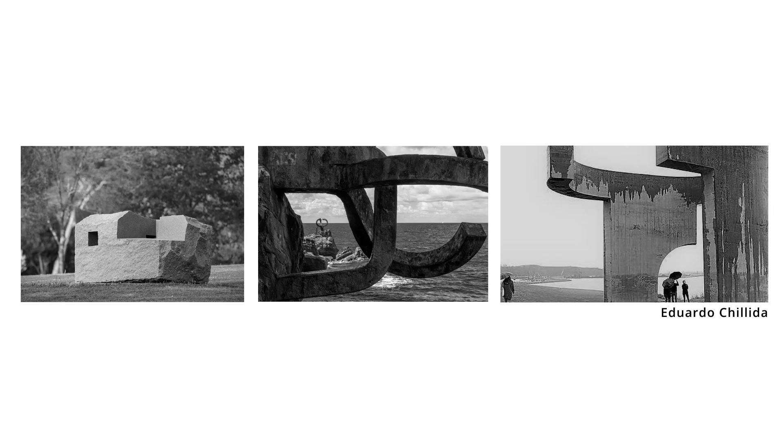Well, it's never easy to explain how a project starts. It usually starts with a commission, but at a certain moment, we as architects have to make a decision about which material we are going to use. And you know, looking at these sculptures, and we are not sculptors, but we deal with material. The same sculptor, Eduardo Chillida, doing a big block of stone, another with iron, and another made of concrete. So the same sculptor using different materials, understanding the potential of each material. Using concrete, he can do these kinds of cantilevers, he can decide the formwork, etc. So in architecture, I think it is important to understand the potential and the capacity of every material.

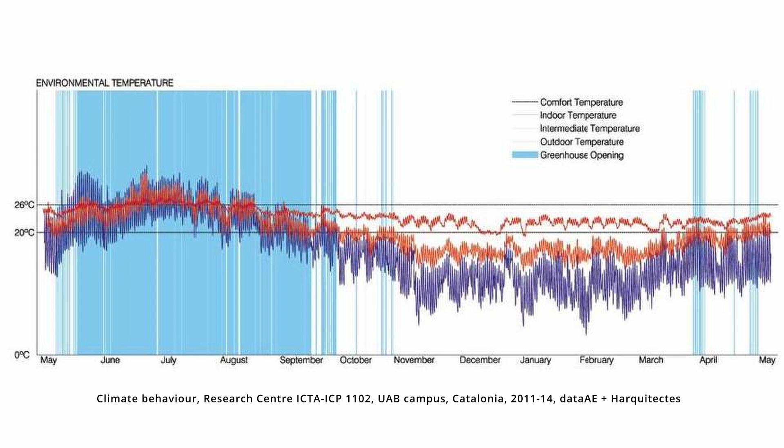Then there's the red line, always in between the black lines, describing the temperatures inside the places of the building that need to be in the mandatory range, like laboratories and some offices. The important line is this orange one, which moves following a bit the outdoor temperature. This line explains the temperature of more than half of the building without mechanical or artificial climate control, using the outdoor conditions and also the air from the more comfortable areas of the building.

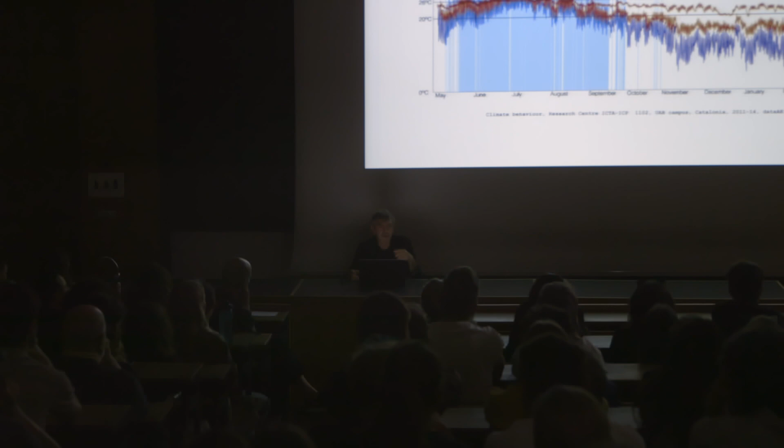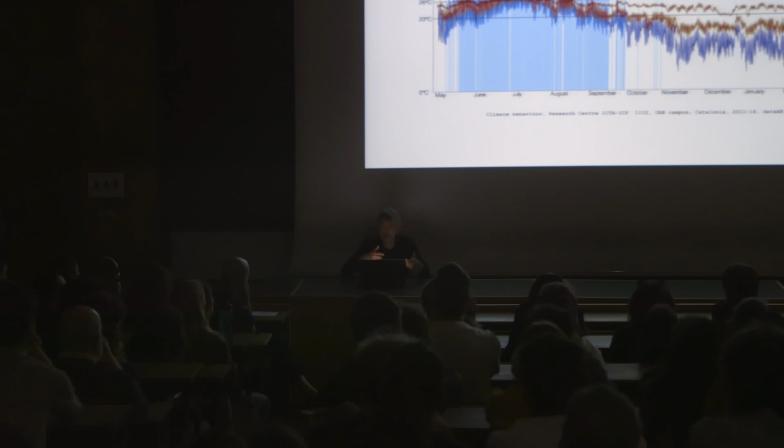These bioclimatic strategies create a temperature that's always a bit better than outside, but in summer it's a bit warm, and in winter it's a bit cold. So if you're in these in-between spaces, classrooms, halls, etc., you need to wear clothes in winter, and you need to decide if it's better to have a coffee on the ground floor in summer instead of the fourth level, which is warmer in winter. So people in this building are making decisions about where they're going to do things in these areas.

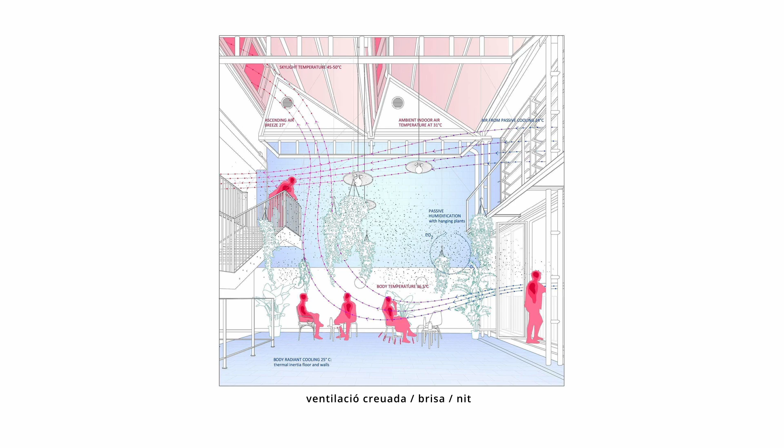I spoke a lot about thermal conditions, comfort, but we are interested in the spaces that we are creating, trying to find strategies to improve comfort. We are interested in spaces, not in the degrees of one space, and this is an important thing. We are not - and I'm sorry for the engineers - we are not engineers. We don't want to calculate, reaching the best result. We are trying to create better spaces to live.

Another condition is the extra height. You know that the basilicas are super high, so this creates a natural stratification of air, and the warm air goes up and the fresh air stays down, so it's a super nice place on summer. If you went to Barcelona, you will realize that on summer it's a good place to be. So this vertical convection is a good tool to create this ventilation during the night.

And we have a lot of sun, you know it. So how can we use the sun to improve the conditions? It's our enemy, but we can be like a judoka, and we can transform the enemy into the main element improving the comfort. And as I said before, this is what we want - to create good places to live.

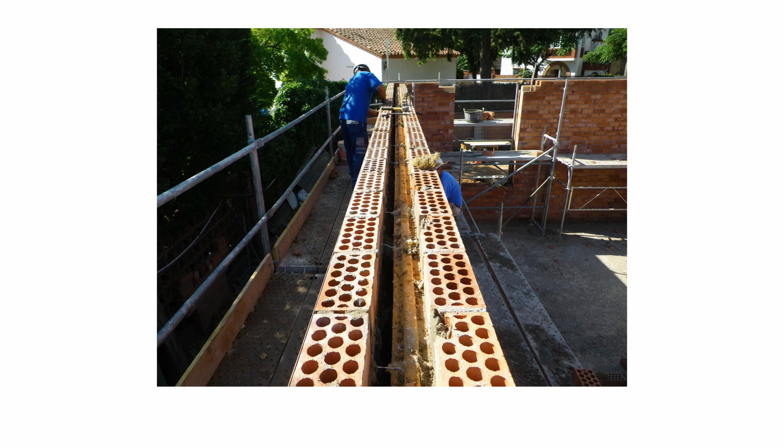And finally, the design is so basic. It's about 3 boxes made of brick, and then 2 spaces in between, like galleries, connecting the 3 boxes. We used brick in this case. Brick is a tradition, not vernacular, but the tradition of the last centuries in Catalonia, in Barcelona. We have a lot of factories doing brick, because we have good soil to do so. In this case, it was a double layer load-bearing wall.

As I said in the beginning, and it's the case of this house, we love to use structure as a way to create specific spaces. So all of our spaces are totally linked with the typology of the structure, and in this case, these load-bearing walls made of brick are creating the spaces.

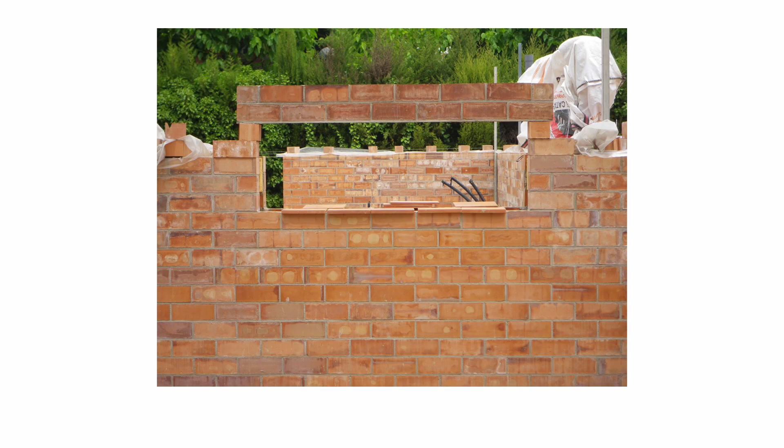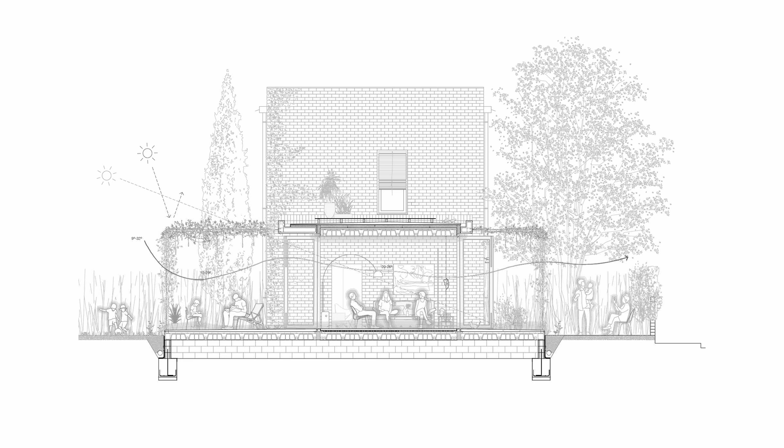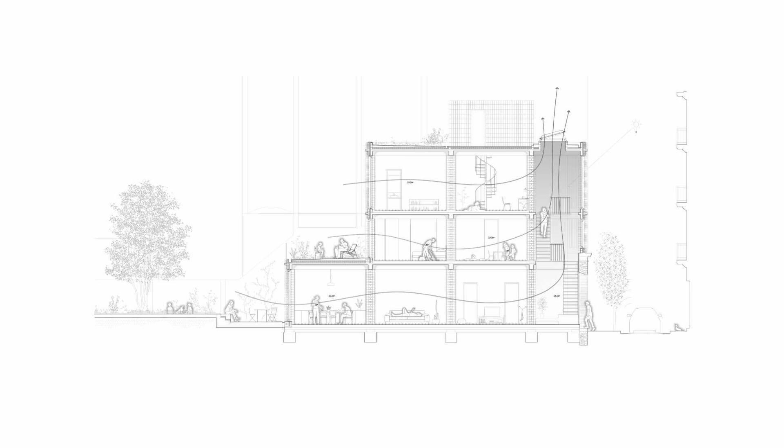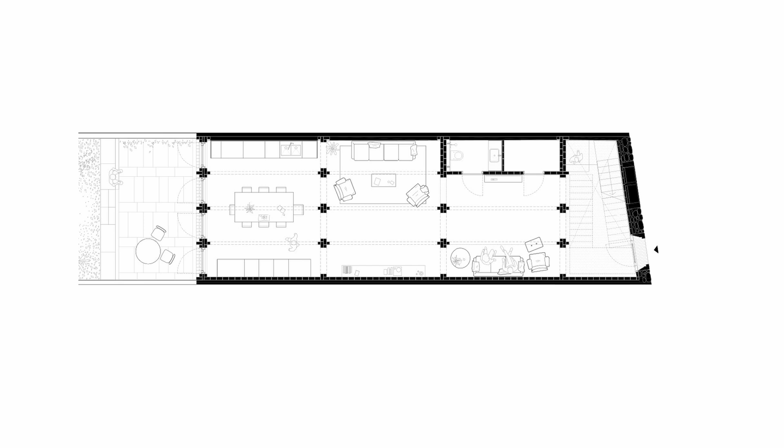But in this case, it's a more recent house in Barcelona. I share this house because it's based also on brick construction, but it's an evolution. It's not about load-bearing walls, well, a kind of load-bearing wall, but reduced to a cross column, you will see, like that. So the same brick, creating big gaps on every wall, so it's more like a column. And the space thanks to this strategy of transforming the wall into this cross column. So it's not about tradition, it's about an evolution of the more typical system.

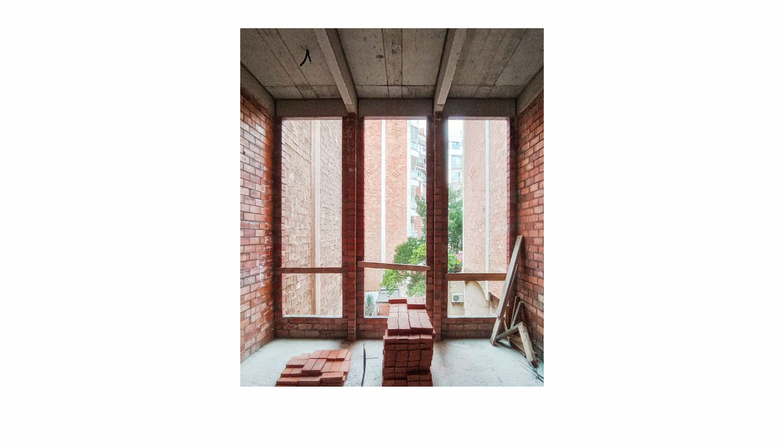And after finished, this is the space that has nothing. So it's totally different from the first house, using the same element, but working in another way.

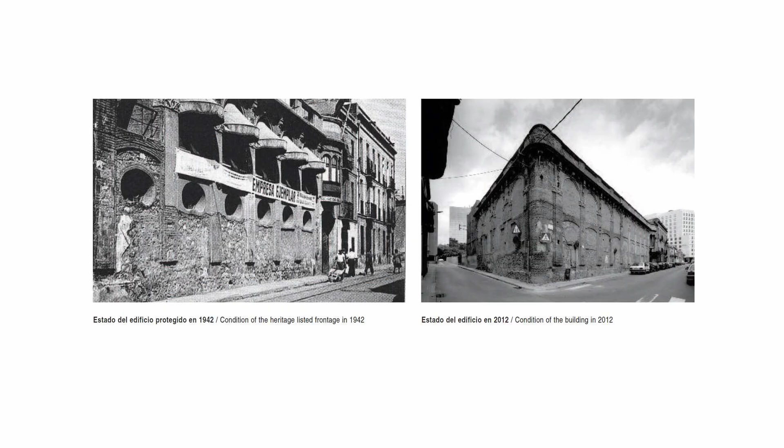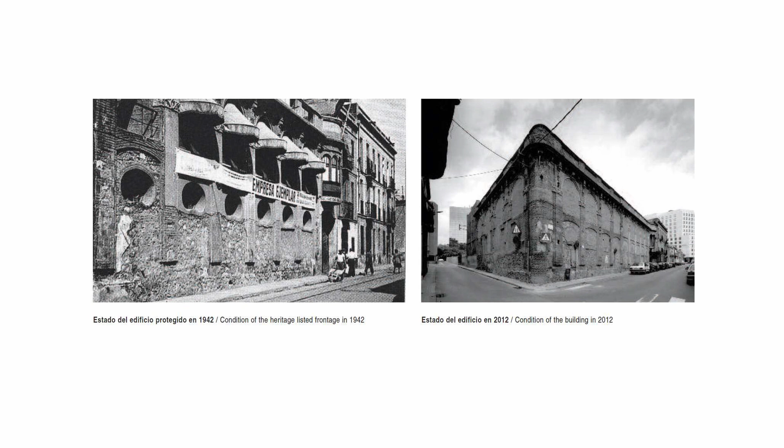And the system is very basic. In this case, we had a heritage facade, so a lot of protection for this facade of a former glass factory. Only the facade remained, the rest was demolished. And the plot was just the final piece of a super big factory located in Les Corts neighborhood, where the Barça stadium is located, so close. So it's a triangular plot, very strange, where we have a facade.

The facade is made of brick and stone, and we decided to use the facade as a structural element, and we continue with the same structural concept for the rest of the building. So we create these load-bearing walls again, and we organize the building in a very simple way.

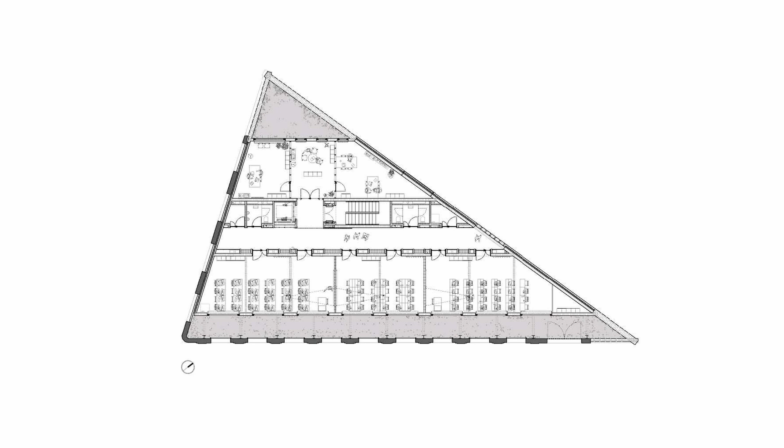On the southeast, we create a greenhouse between the old facade and the new one, just a tool to improve the conditions of the air. Then in the largest part of the triangle, we put the classrooms. There's a thick wall where the pipes connect each classroom to the chimneys, you will see later, the corridor, staircase, etc., and the smallest parts like offices in the smaller part of the triangle. Then the entrance is another greenhouse, but it's not really a tool to improve conditions, it's more a way to get inside this building.

So these two gaps, the window and the black one, are creating the cross ventilation. Coming from the basement, the underground, the air is moved to the gallery, the greenhouse, and then crosses each classroom. The air is moved for stratification, but not only for that, just for the difference of temperature. So in the chimneys, we are reaching 80, 90 degrees, so it's super high, and this difference of temperature creates the movement of the air.

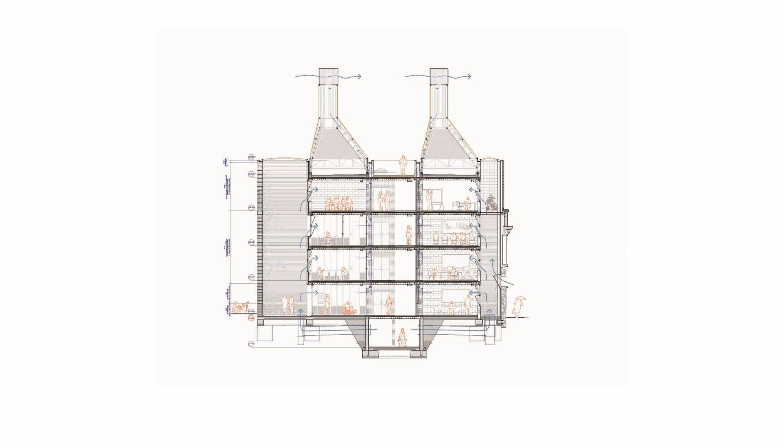You will see in the pictures a very basic chimney, an industrial chimney, to create the Venturi effect, to reinforce and increase the speed of the air, and it works so well.

On the right, in winter, everything is closed. We just open the chimneys to renovate the air when there's a lot of people for a long time in a classroom, otherwise it's always closed. And in summer it's the opposite, we always have ventilation during the day, but also during the night.

We work with engineers because we don't have the knowledge and the software to create these simulations, and we are always discussing with engineers or architects specialized in that. But all the decisions about the building are on our table.

So they create graphics, they create analysis, they create these simulations, but the shape of these chimneys is designed by us. The pyramid, this asymmetrical pyramid, different for each chimney, is based on reducing the shade that all the chimneys are creating on the others. So again, something that can be rationally explained creates an aesthetic effect, and we love that, improving the design, we are creating a language in a way.

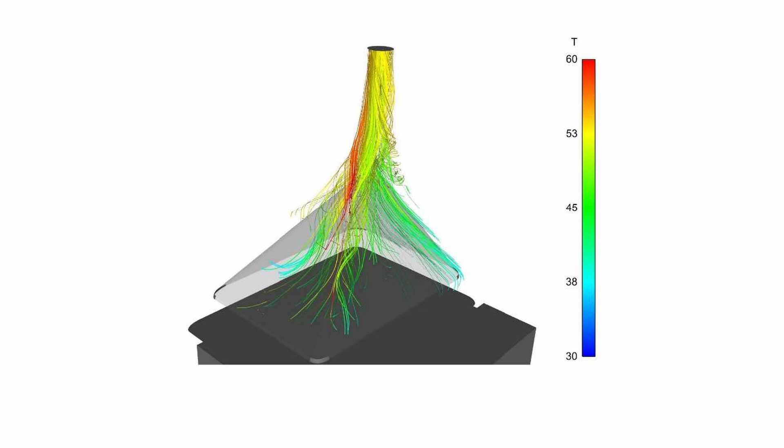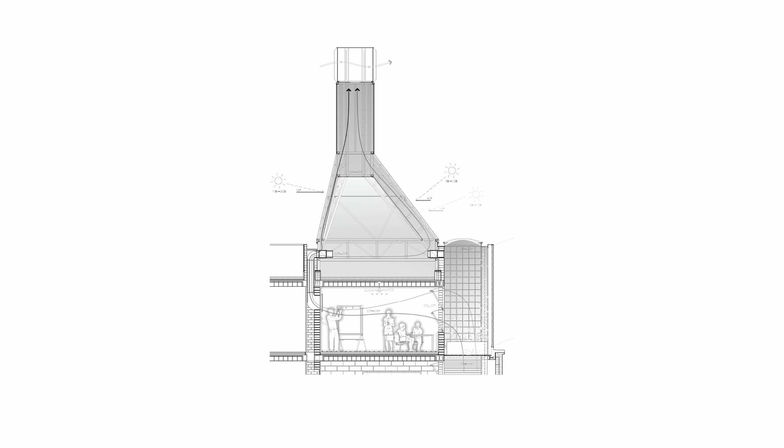I'll explain how it works. It's very simple: the air is not crossing the pyramid, it's just crossing an air chamber between the transparent one outside and a more inner one, which is a black textile membrane, to increase the temperature. So the air is coming from the classroom, crossing the pipe, arrives here, and then it moves, crossing this air chamber, and then it gets out through the chimney.

But again, of course, it's a machine and so on, but the important thing is the people, the proportions of the space, the inner facades, the relation from the inside to this greenhouse, etc.

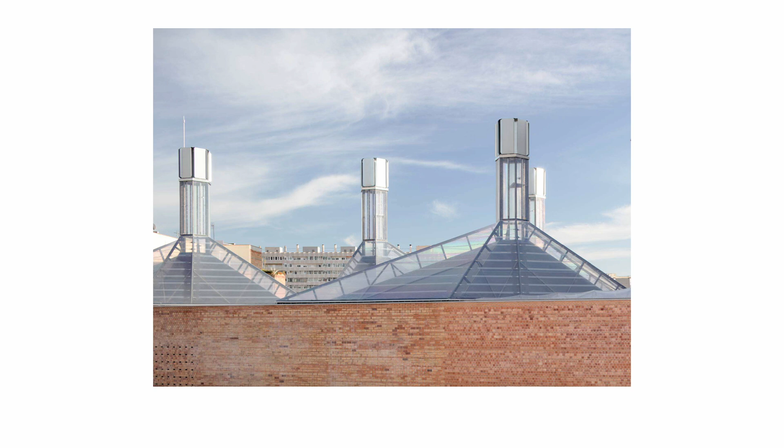And these are the 4 chimneys, a different pyramid for each chimney, the pre-existing facade and the addition that we did. We blinded some windows where we don't want windows. We respect the heritage value of this building and all the buildings that we deal with.

But it's not essential for us, so we are not always so respectful of it. For us, a pre-existing building is a tool to support, to create again a very specific language and to give a very specific character and personality to this new but old building. So we manage the heritage in that way—how can we use it, and how can we keep the spirit or personality of the pre-existing building.

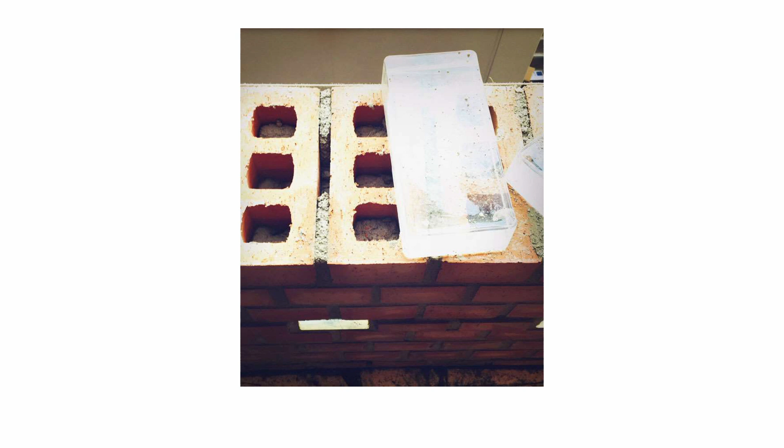This is the entrance, where everything is almost new. You can see these black dots on the facade that are lighting the inside—it's not actually a light, it's just a massive glass brick, a beautiful and very expensive one from Italy. We use it, in a way, to make a kind of homage to the past of this former glass factory.

This idea of absolute space—well, it's about monumentality, but it's about the idea of how a lot of things can come into one space.

And this is a winery in the south, a very specific area, a wine region in the south of Catalonia called Priorat. Strong wines are made there thanks to the soil. So our winery is in the middle of the city, close to the village, close to the church. The project is very simple: we put this tool to improve the conditions to create wine with these tanks. This is the main space, or almost the only space, and then there's a kind of path between the party walls, the pre-existing walls, and this perfect box to create wine.

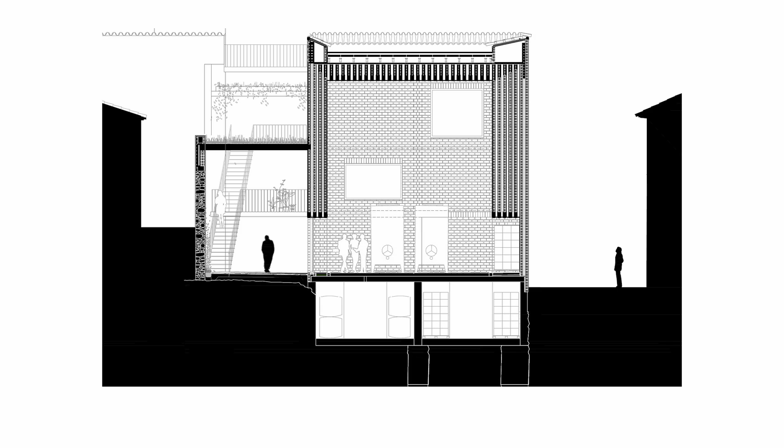As I said, we work with engineers, creating simulations to understand how this can work. The air goes up, crossing these chambers, and then at that moment—here there's a drawing of the cross ventilation for the night—but I'll explain the sophistication of the system later.

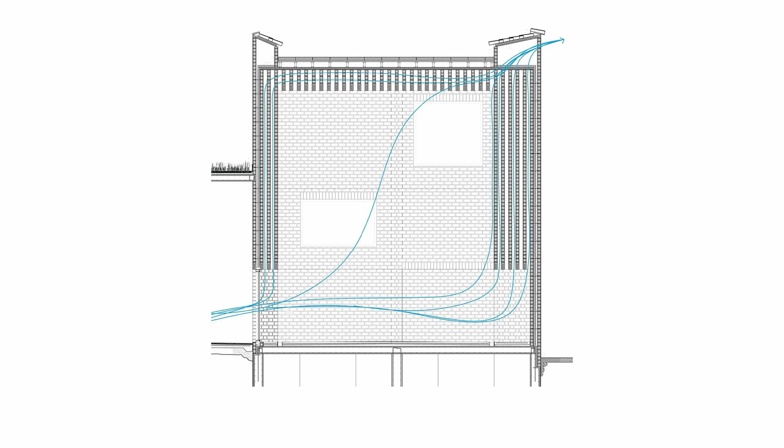This is the more conventional functionality. So we designed a tool that moves the air in a sophisticated way, but it can also work using typical cross ventilation and stratification thanks to the height, like this. This is the night-summer function, but for the air it works like that.

Inside the main hall, the air goes up as the temperature rises. It goes up, and when it touches the ceiling—the roof is made of multi-membrane layers of perforated bricks, you'll see later—the air, when it arrives on top, starts moving to both sides, left and right, and goes down, crossing the air chamber. This movement, this process, refreshes the air, and it arrives at the ground floor at a good temperature, and the cycle starts again. So this never-ending story is what's happening in this space.

Again, all these elements—the 7 layers of walls—you'll see the system on the roof, and also how it works outside the roof, which is more sophisticated. It's a tool, but it's a specific space with quality, this absolute space that I mentioned.

And here on top, there's a kind of invention, because the roof is super thin—just 2 layers of ceramic tiles. So this gap is very, very thin, and on top there's water.

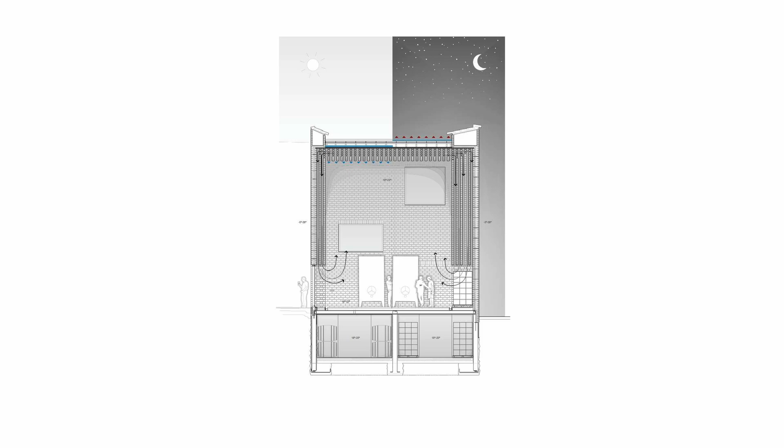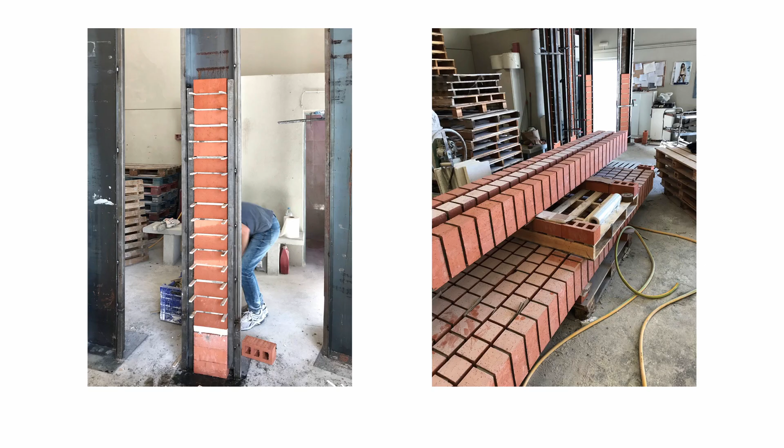And in this case, we use the brick in a very sophisticated way. So we prefabricated beams using brick to do all this ceiling, you will see later. So we put this kind of bricks with 3 gaps. It's a structural brick, it's a load-bearing brick. So we put them vertical with the steel bars inside, and we put in concrete.

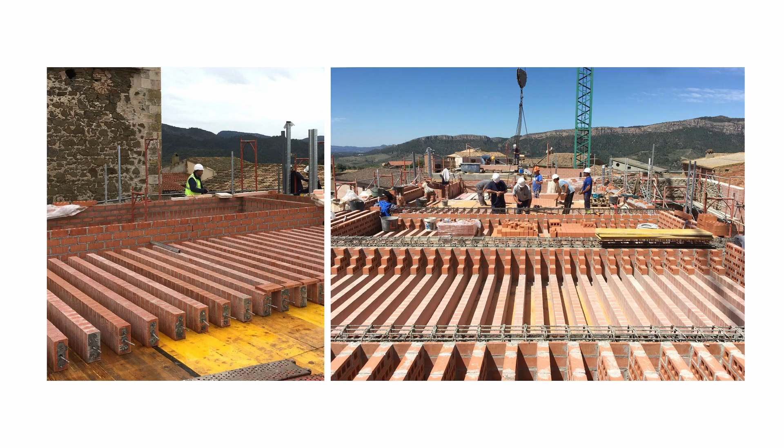This is the moment, so we fill with concrete inside the gaps, and then at a certain moment they can start working as a beam. So we did that in a factory, and then a lot of beams arrived on site, ready to start working as a beam. So you can see here the beams filled with concrete and the steel bars, and then supporting the bricks that are creating the different layers on the roof. In this case, the bricks are not horizontal, they are vertical, so the gaps are creating this ventilation effect through the gaps.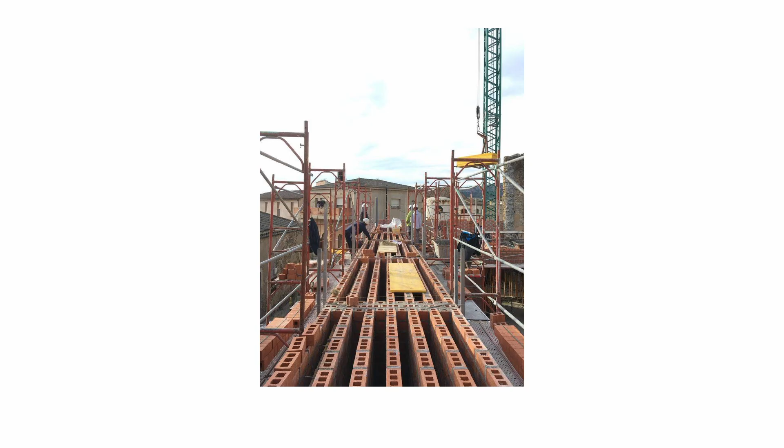These are the layers of walls that are touching the south facade. We did 80 plans like this one, describing all the bricks, the different cuts of the bricks. You can see here the white ones are the original size, the orange are a cut brick, and the yellow too. So we did this drawing for all the layers of the building, 80 times, I mean.

This is the construction. You can see the difference between north and south wall. And on top, this pool of 10 centimeters of water. Again, it's not a place to be, it's a secret, it's a hidden part, but it performs the behavior of the building. And this is the entrance to this kind of inner street. A moment where you can see the tanks where the wine is made. This is a semi-outdoor space, just roofed, but totally open. Some views to the landscape.

This is the street. Again, there are some parts that are original stone walls, but we added new layers, of course. And this is the winery itself, where the tanks are located. You know that it was not necessary. So every tank can create wine; they have a machine to regulate the temperature, so they don't need good conditions outside the tank.

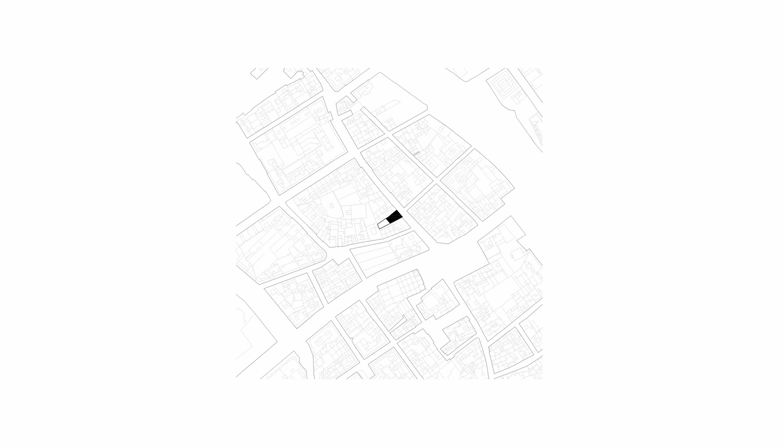And we started like that. So, okay, in this geometrically messy plot, we have an inner facade, we have a street facade, but we have a lot of depth in between. So we decided to create a big gap, a big hall, a big atrium in the middle, organizing the rest of the house. So we put this atrium inspired by the Pompeian house, you will see, and it's evident. And then we started doing a second level of rooms, which are bedrooms, kitchen, etc., connected, crossing this black element.

So we understood the house as an original concrete stone, and we started excavating in it the atrium, the rooms, etc., and also the third level of spaces, bathrooms, toilets, staircase, etc., that are painted in gray. So trying to create, depending on the rank of the space, order in this geometrically messy plot. And of course the atrium is a way to have cross ventilation for all the pieces of the house.

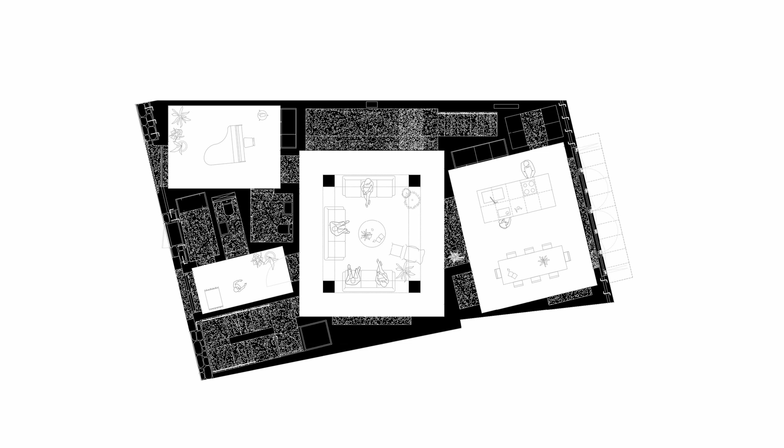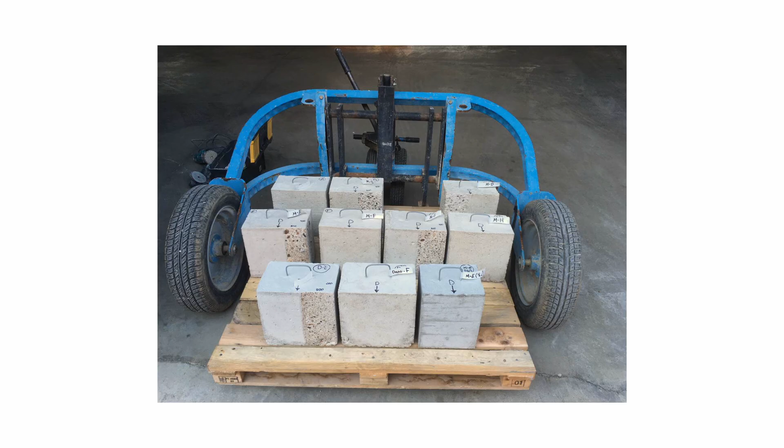And this is the plan with the garden. So it's very messy, but it has a hierarchy. For this house, the challenge was to use massive concrete, just putting steel bars in the columns, of course, but for the rest of the house, it's like a stone. And we did some tests with special concrete in different plants around Barcelona, close to the place. And on every mock-up, we tried to polish the concrete, because all the excavated spaces, toilets and bathrooms, are polished, you will see.

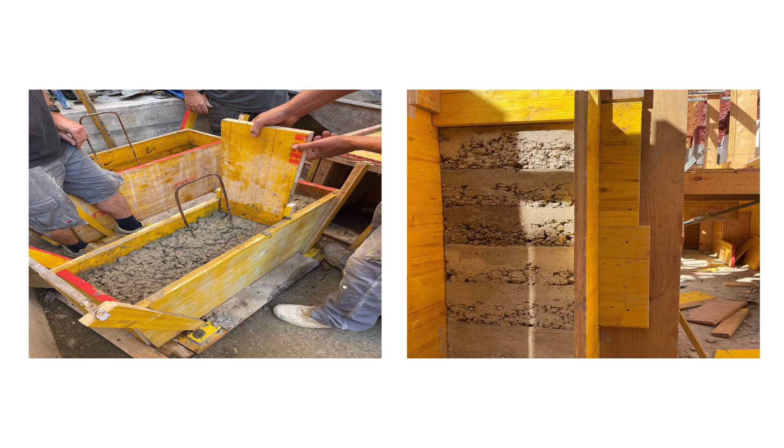This is the process. So the process was based on the rammed earth process, so layer by layer. And it was not a problem for us, just the opposite, to create this surface with gravel and gaps, improving a bit the acoustics of this super high space in the middle, but creating a lot of personality, because it's 100% concrete, but it creates a very special effect in terms of matter.

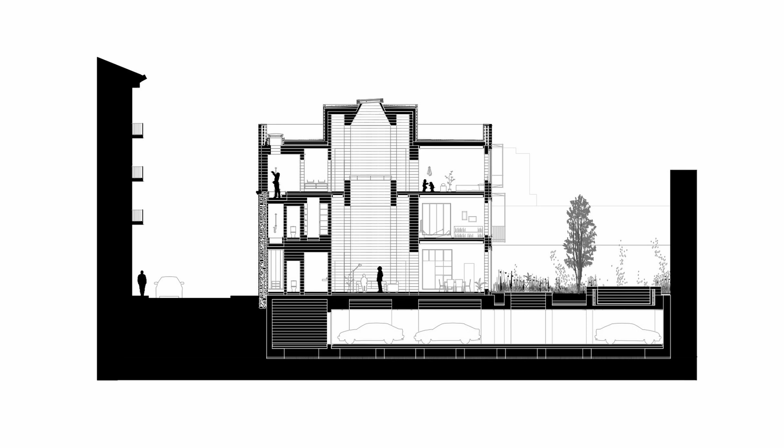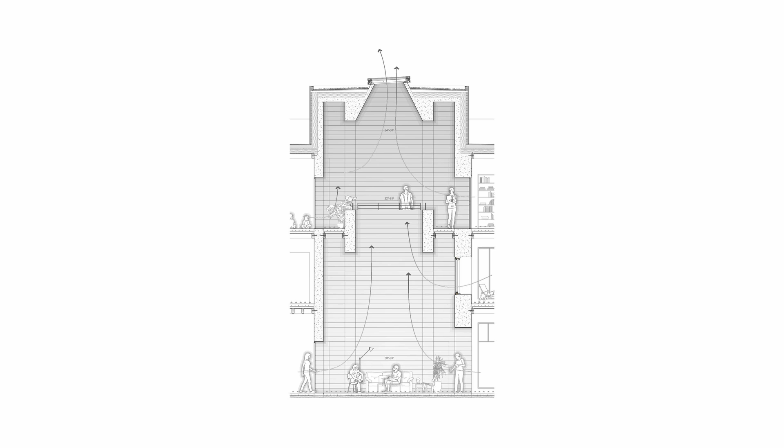This is the section, so you can see here the atrium and the main rooms around the atrium, and then small pieces that are kind of excavated. Of course, they are not excavated. We did formwork for all the pieces, and this is how it works. So stratification again, thermal mass. We have a piping water system in all the pavements, and then we have a window on top. And this is the ground floor with the 4 columns and this very special massive concrete.

The kitchen that is between the atrium and the garden. And this is the inner facade. These roller blinds are the typical ones from our Mediterranean coast. All the slabs were done in wood. This is the atrium with the cloister in the top floors, the stair. So, as I said, it's a tool to improve conditions, but it's more about the real atmosphere of this place. And you can see the polished concrete in this shower. And the facade with the existing parts, the one with heritage protection, and then our added level, etc.

And this is the final part, just a row of 3 projects that are very connected in terms of, let's say, the construction system. So this is a house in the north of Catalonia, in L'Empordà, a very beautiful area, beautiful landscape between Girona and Costa Brava, the seaside. So it's a medieval village. You can recognize the shape of the medieval center, which is totally protected in terms of heritage. So there is a very restrictive regulation of aesthetics. Our plot is not in this center, it's just around it, but we were affected also with this ultra protection

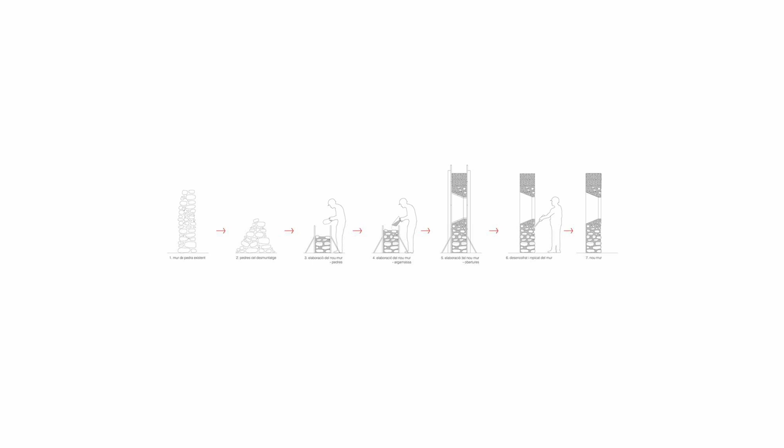And we used three different kinds of walls. On the one hand, the facade, the gray one, it was like that. So we put all the stones only touching the street. Then we have the division walls, structural load-bearing walls, but inside, separating inner spaces. So we put a lot of stones there to reduce the amount of concrete.

And then we have several porches in the house, so inside and outside. And we don't put stones there to increase the insulation. So it's concrete with more insulation inside, so we had better insulation in there.

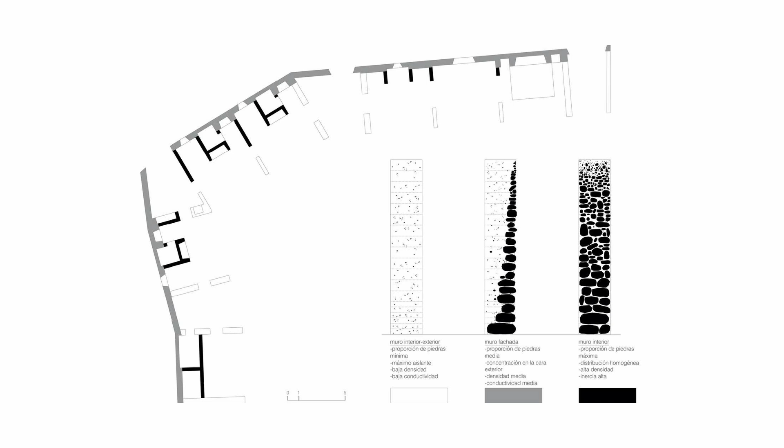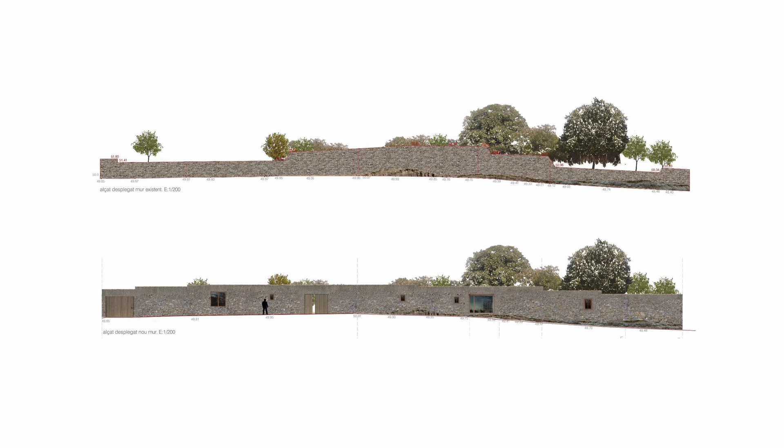So this is a drawing that we did to convince the heritage architects. So this is on top, the original wall, on the bottom, the house. So the house is the wall. We had to do a wall, so we did a house doing a wall with just a few gaps. This is the north facade. In L'Empordà, in this area, there's a strong wind coming from the north, so the wall protects the house from this strong wind.

And as I said, the house is a wall, so totally open to the garden. The garden is facing the south, it's facing the landscape. It's in the high part of the village, so it was perfect. There were a lot of good conditions to open the house to this side.

And then, well, this is the common areas, living room, kitchen, etc. There's a porch, and then there is an enfilade of rooms, all of them connected. You have to cross one room to go to the second one and to the third. So it's radical in terms of how people live there. Otherwise, you can cross the garden and you will not cross the rooms.

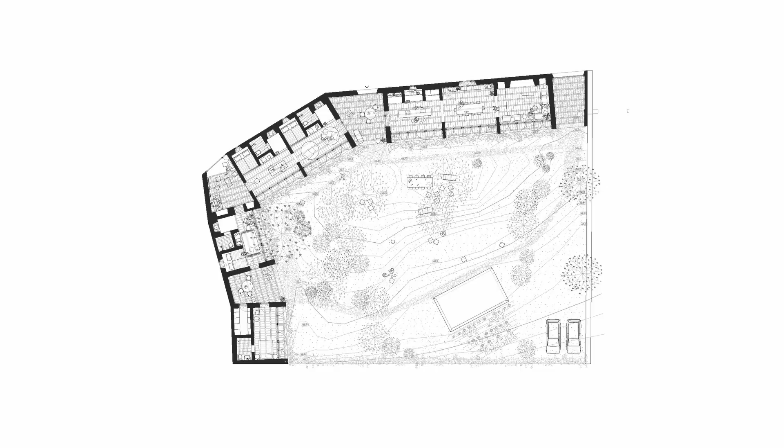So it's radical, but we explained this situation to the owners, and they like it, and they have lived there for 6 or 7 years, and they are happy. So they understood how to live with these conditions.

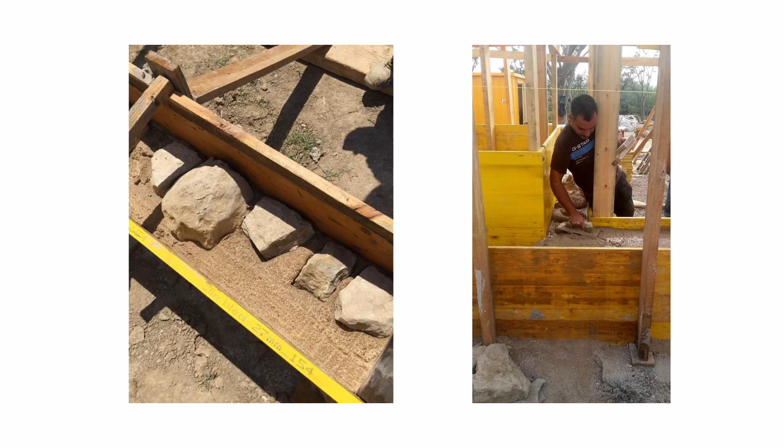This is the construction process. So for the project, we imagined that we would do the first layer totally, then the second layer, but finally the constructor proposed to us to do a single part from bottom to top, not layer by layer, but starting here, with these 20 centimeters stratification. And it was like that, so it was super craft work.

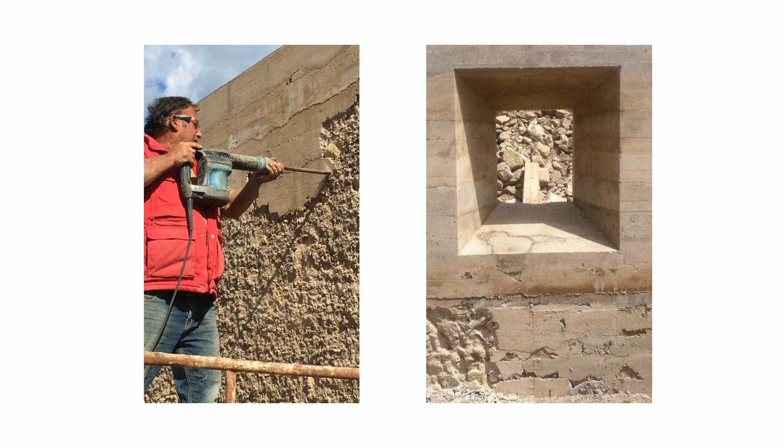This is the facade wall. You can imagine this is the final situation when we bush hammered the concrete. Lime concrete is easy to demolish a bit, so it's less strong than cement concrete. And this is the final result.

So again, the process in this case of demolishing the surface was kept with this frame of the window. So if you are an architect, you can understand what happened there. If you are, let's say, a normal person, it's not necessary. You just see, like in the vernacular architecture, a window framed with a more solid element.

And inside, as I said, is the opposite. So again, all the spaces are the structural spaces. So everything is working to support the roof.

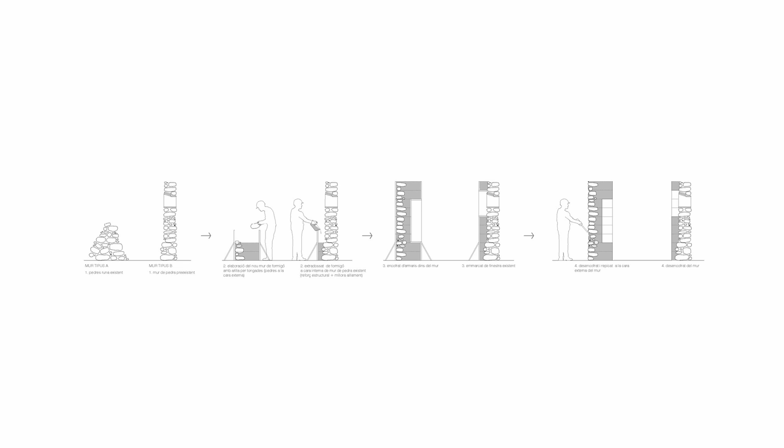And in this case, we have a double process. On the one hand, the amount of stones, and then the original walls. For the amount of stones, we proceeded like in the Ullastret house. And for the original walls, we just added a structural layer to reinforce the original facade. And the final result is that we have facades made of stone outside and facades with stones based on this thick concrete. This is the original state.

And this is the construction. Almost everything was new, actually. But again, it's the same process.

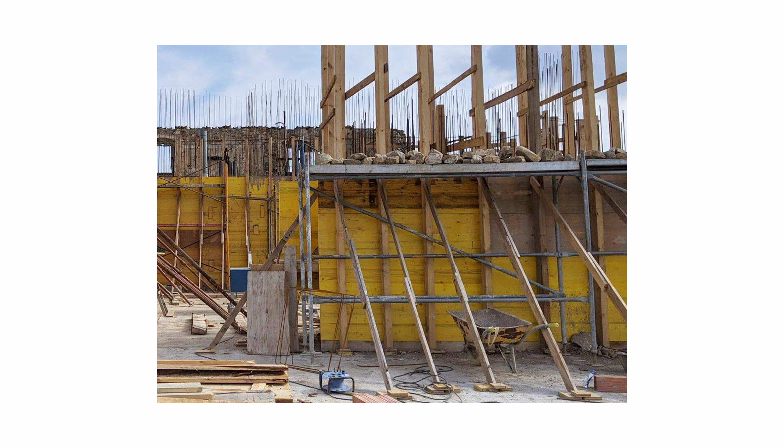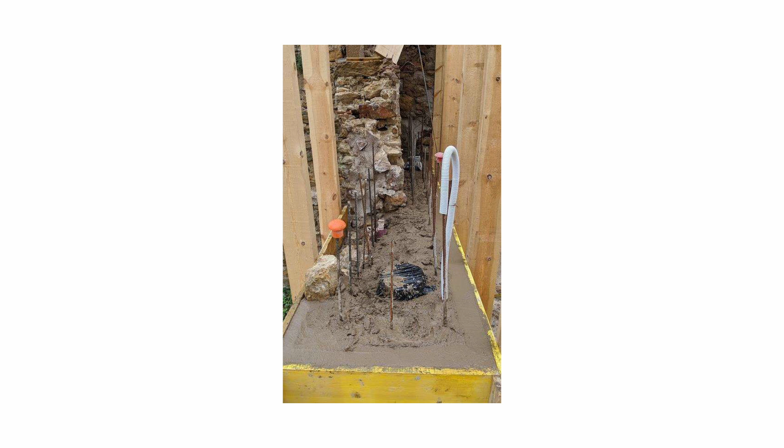So we did layer by layer the concrete wall. But in this case, we had extra height inside, you will see the kitchen, it's super high. And we need to reinforce concrete. So this is not lime concrete, it's cement concrete, the typical one, in gray color, in brown color. And we work like that. So we put steel bars inside, we had some ruins, some walls pre-existing there, and then the new ones.

Again, you can understand the process of the design and the construction of the house. On black, the original, on red, the addition. But it's not important for us, this idea of history. It's more about the final building.

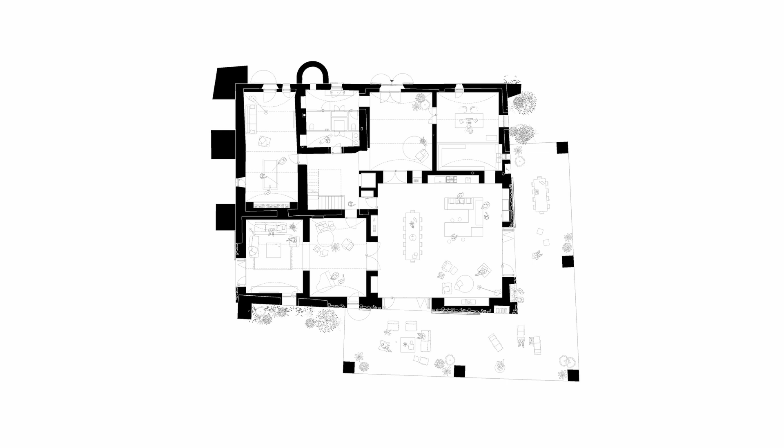So, of course, old walls and new ones are creating different effects inside, different atmospheres, but they are, let's say, playing together, creating a totally new house. This is the kitchen you will see later with this big porch. And this is the difference between this house and the other. So we have some pre-existences here.

Some buttresses. This is almost a totally new facade, except the buttress, and this duality and this tension and this relation between new and old, creating new gaps, new windows on the east facade.

And inside it's the same. We had a few original walls inside, but they are giving very special moments there. And this is the kitchen with this extra height. That's why we need to reinforce the walls.

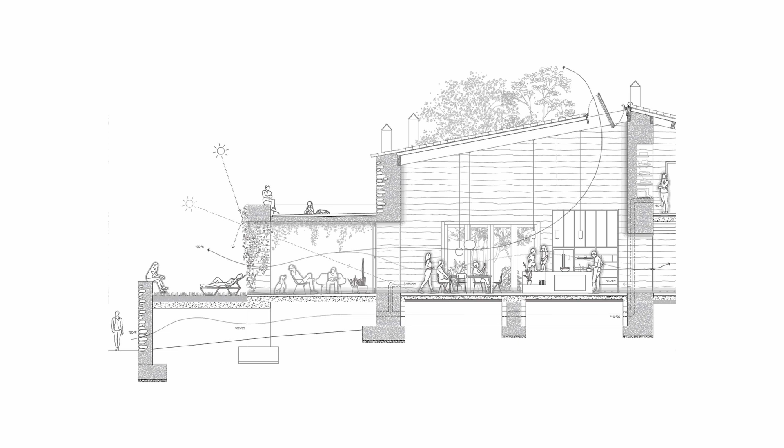And again, the project can be explained in terms of how the building performs, in terms of comfort, again, based on massive thermal mass, cross ventilation. We take advantage of this air chamber between the rock of the soil and the concrete slab. We cross the air, and then it goes up to the first floor, which is more warm than the ground. And this is the special situation here. As I said, it happens in 2 or 3 spaces of the house.

And this is the last project, which is again an evolution of how to deal with ruins. In this case, it was with the material that came from a demolition. So in this case, this is in Palma de Mallorca, in the island, Balearic Island.

And it was a competition that we won, not designing a proposal, but writing a text. So because they were asking about the strategy to create 25 apartments for elder people, and the challenge was, on the one hand, they wanted to build it very fast, and they were expecting a wooden system, CLT, which is not the tradition in the island, of course, but they wanted a very fast construction.

But they asked also about, so it was mandatory to demolish this building, a former school, abandoned in a very bad state, out of regulation also in terms of volume. So they asked if there's a way to reuse this material, but it was a very small question.

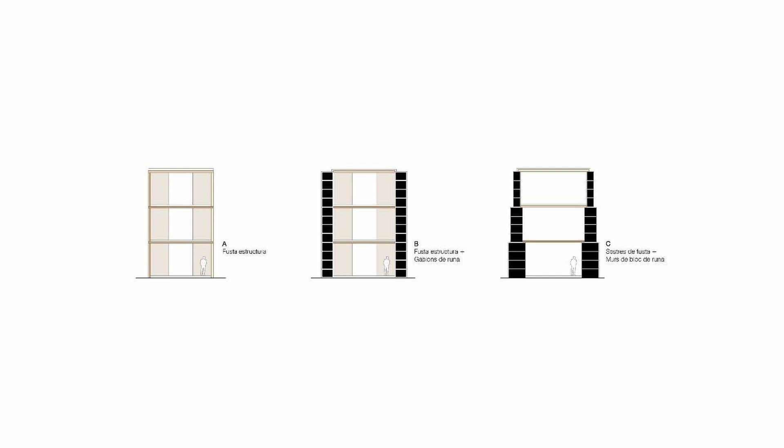So starting with the timber structure and evolving with this very thick wall structure, reducing each wall on every level because we have less loads in the top floor compared with the ground floor, so reducing the size of the blocks, and this was the scheme.

And for the demolition project, we designed a single formwork that can be reused for every brick. So we designed a process based on that. So we imagined creating every single block with its formwork that can be reused for a second block, for the second brick, pouring the ruins inside, concrete, ceramic, etc. And we designed also some strategies trying to imagine how we can use a crane to move these very, very heavy blocks.

But it happened that during the demolition, we discovered that the load-bearing walls of this school were done with marés. Marés is the sandstone typical of Mallorca. Old houses were done using this material. It's a stone that can be easily cut with a saw, very easy. So it's a light stone. So at that moment we started thinking, it was a pity to hide this amazing material inside these concrete blocks, these concrete bricks.

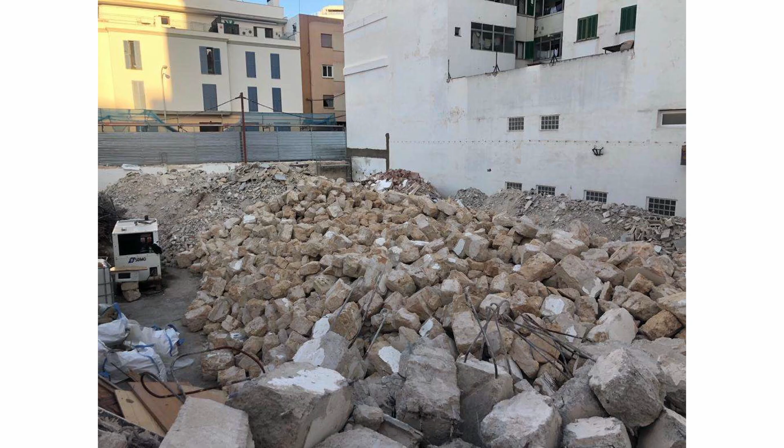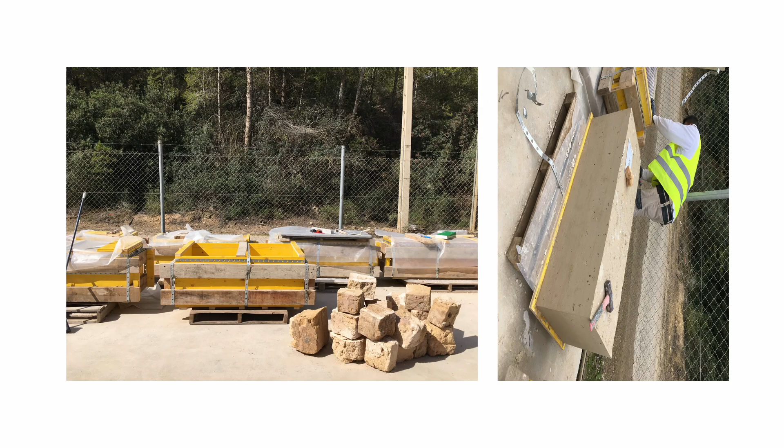So we had this big amount of marés and other materials. You can see concrete also, but we had a lot of marés. And we started doing the first mock-ups of these single precasted bricks.

But discussing one Friday in the office, somebody said why, instead of doing a single brick, why can't we do a bigger slab, like a pool, 4x4, and then use a big disc, cutting the different bricks. And with this idea of cutting, the stone will be cut and will become part of the surface.

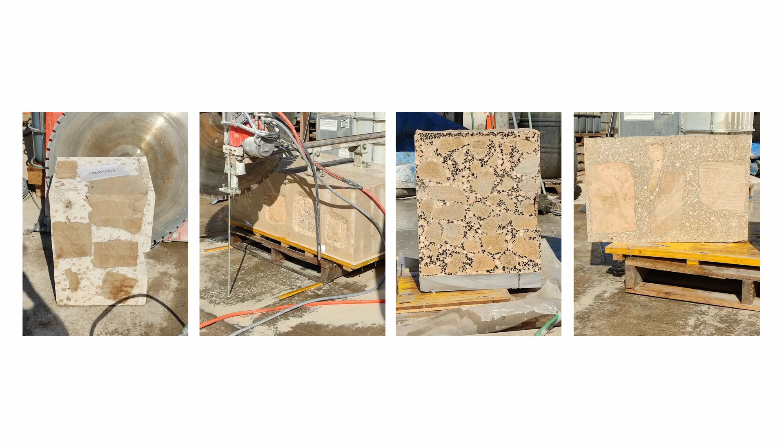the demolition project. So the project was assigned to a demolition company. They have a cost, a budget, a closed budget, to do what the project described, which was this single formwork, blah blah blah. And of course, it doesn't matter if this process is cheaper, because the constructor, when they are in process of constructing, can put the price that they want, more or less. So what could be cheaper becomes the most expensive solution in the world.

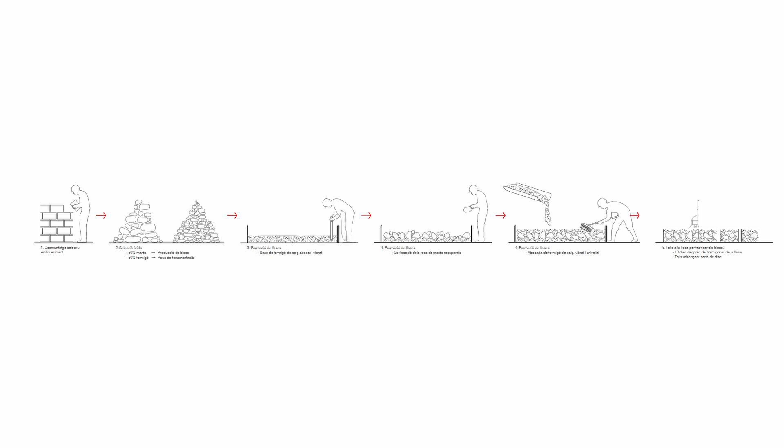But as I said, there was no way. We wanted to do that because it was better for sure. So we started rethinking and doing a lot of tests, trying to find the best process to have the best price. And this is the process that I described.

So we demolish the building. We have an amount of concrete ceramic that goes another way, just to reuse the concrete of the foundations. And you will see the walls of the semi-underground level. And then the rest, I mean the marés, were reused for this invention of precasting big bricks of concrete.

So again, it was a 42 centimeter height concrete slab. 42 was the maximum size that could be cut with this disc. So we changed the project to adapt to this new size. And we put one layer of concrete and then the stones, but in a very massive way.

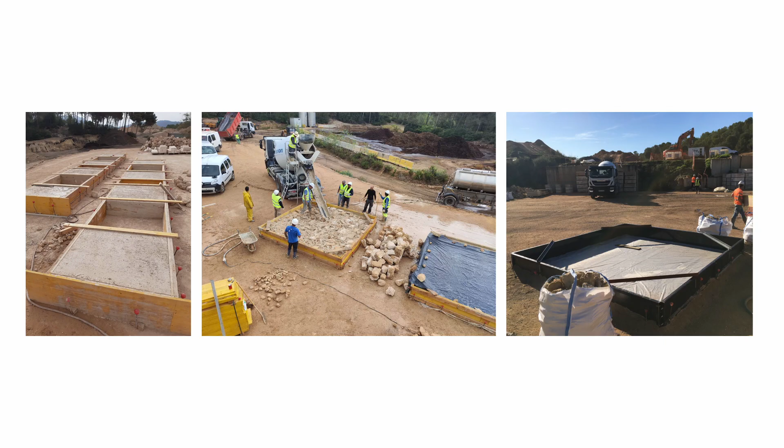So the workers were demolishing workers, so everything had to be very basic. And this was the process: one layer of concrete, then stones, then concrete, then take out the formwork, and then cut it in pieces. Easy to say, difficult to achieve.

But, these are different moments of the process. We started doing bigger concrete slabs, cutting them into 2 or 3 pieces, but we discarded this option. And finally, these 4x4 slabs were done.

For the first tests, we did a specific formwork. For the rest, we created steel formworks that could be reused. So we had, I think, 4 or 5 formworks like this, and we were reusing them for this row of production that you will see later.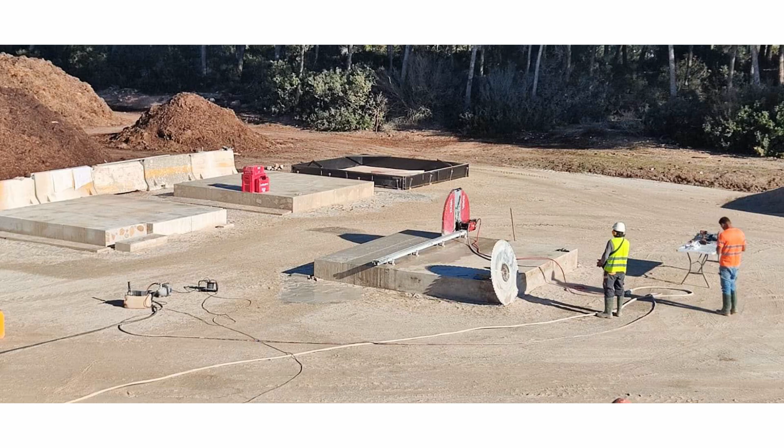So this is the final process when we found a solution after several months. It was not fast, also for the cost discussion, but it was not a problem. We started doing it in a kind of row process, very efficient in terms of time and real cost.

So we have the formwork, the last pool that we did, another that was on another day, and here you can see the cutting process using this big disc.

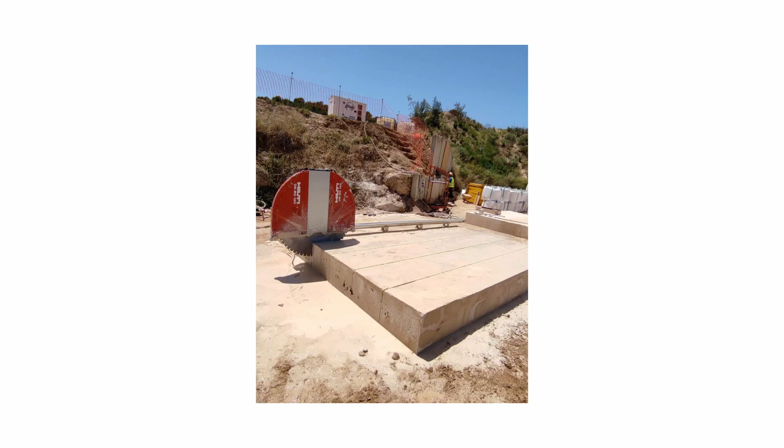As I said, the process was very basic at the end, not in the beginning. So we found a good way to do the blocks, and this was the blocks that we had made on lime concrete.

So lime concrete means that the resistance, the load-bearing capacity, is lower than cement concrete—lower meaning 40 or 30% less. It's more healthy in terms of CO2 emissions because lime is better than cement, but we have less resistance. But the material was amazing, so we have the marés stones inside, you will see.

We also used gravel coming from the marés quarries, so there is gravel made of marés inside. Finally, 35 to 40% of the volume is marés stone.

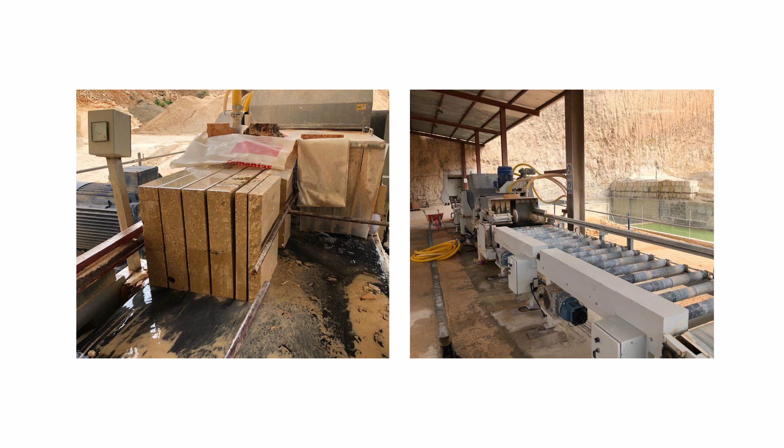And also, we have structural walls, you will see later, and then we have perpendicular walls just to—I don't know the name in English—so we have the main direction, and then the perpendicular is avoiding the movement of the load-bearing walls. So we use this big brick divided into 4 using the typical

saw that was used for marés to create these thinner bricks. This is the amount of different pieces, so a lot of them, but there are some pieces that have, I don't know, 400 units, and there are some pieces that are, I don't know, 4 units. So we have all the catalog.

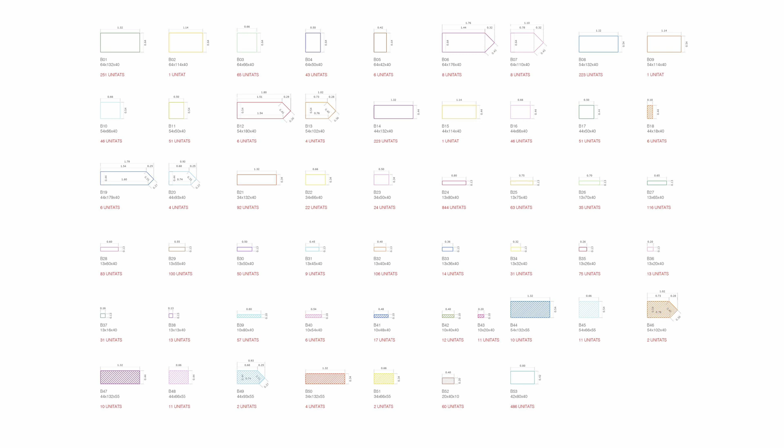Mostly, I think that we did 3,000 big bricks, and we created 1,000 more by cutting the third part of them. And this is the result - the sign of the cutting process is kept on this amazing material, this cyclopean lime concrete brick.

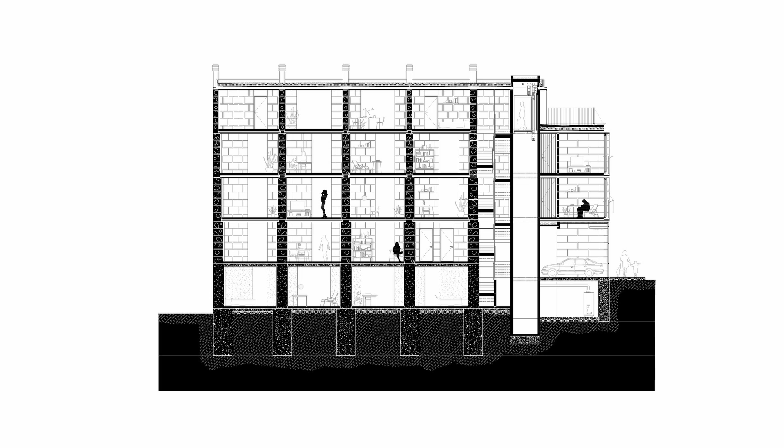And this is the section of this building. We have very deep foundations, massive, where we put the rest of material, ceramic, concrete inside. Then level after level, the thickness of the wall is reduced. And also the slabs are done with CLT, with timber.

Finally, also the construction process was very fast for the contractor. Then in Mallorca, everything goes slowly, so it's an island and time on the island is different.

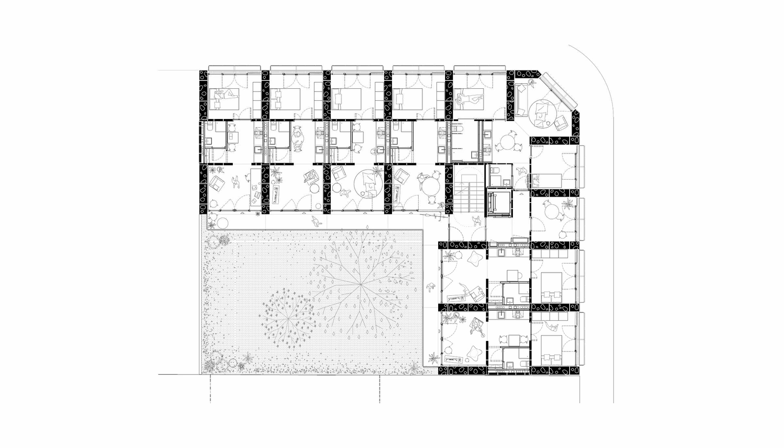This is a plan. Again, this is the walls that I mentioned - the main walls, load-bearing walls, and then the perpendicular ones that are supporting like buttresses, the rest. So the plan is the result of this big blocks strategy.

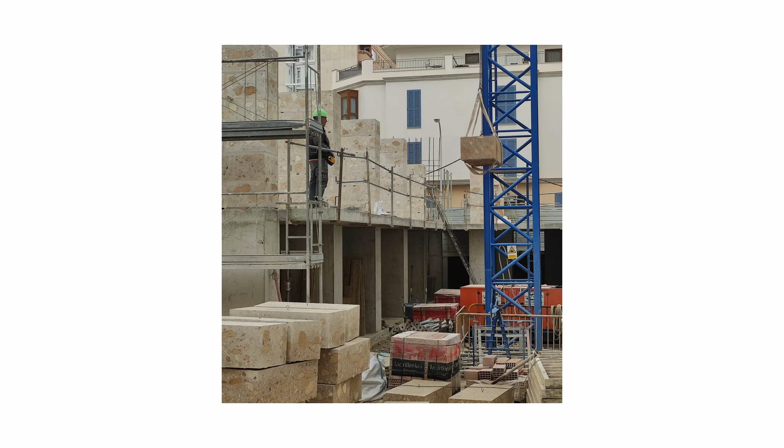And this is the different types of blocks located in the building. You can see that in the semi-underground, we use concrete, typical massive concrete, again just reducing the steel bars, but it's massive concrete. And then in the ground floor from top, it's these new blocks.

I must tell you that finally, when we find a solution for the blocks, again, the cost issue appears, and then they asked for more money. Okay, we have the solution, but it's more expensive. And we didn't have time to think a lot.

And we did one test using cement instead of lime concrete. That's why the concrete with cement came from a plant - it was an industrial production, less expensive, of course, and with more resistance. And this was the key to work like that.

So after one day, the resistance, the load-bearing capacity of the block was reaching 15 newtons. Imagine that lime concrete was reaching 7, 8 after 2 months. And the thing is that during the life of this lime concrete, the resistance will increase, but very slowly.

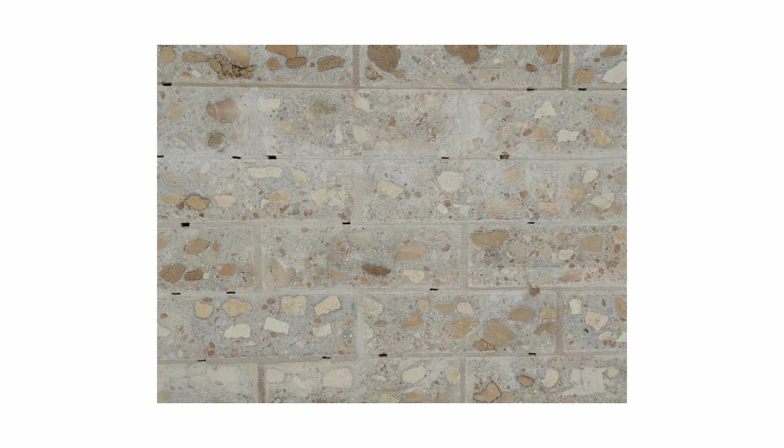So this is the final result. It's very special - this is the cement blocks with a lot of resistance during the construction, with timber slabs.

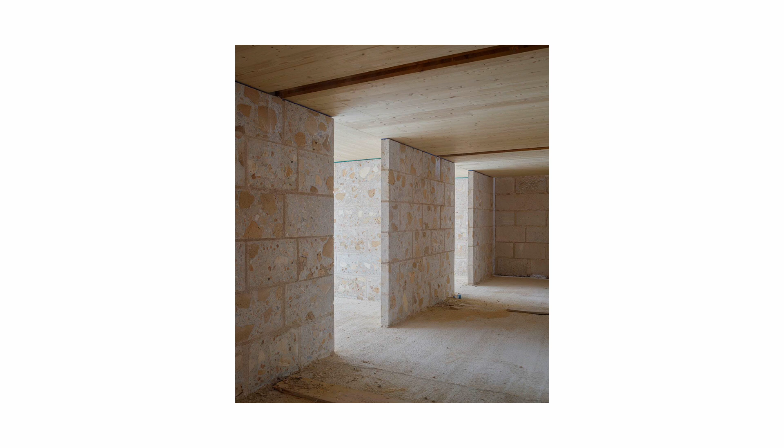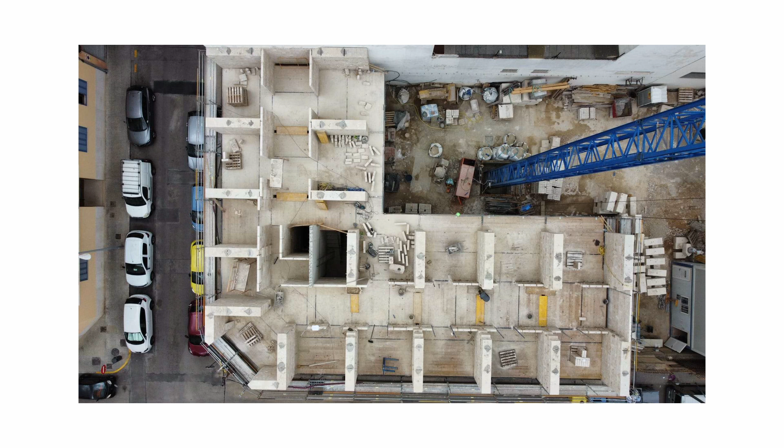We have 3 levels on the street, 5 inside. And the structural system is also the distribution of the building. During the construction, you can realize that the thickness of each wall is reduced on every level. And then we have a chamfer, which is something very weird, but it was mandatory for the urban regulation.

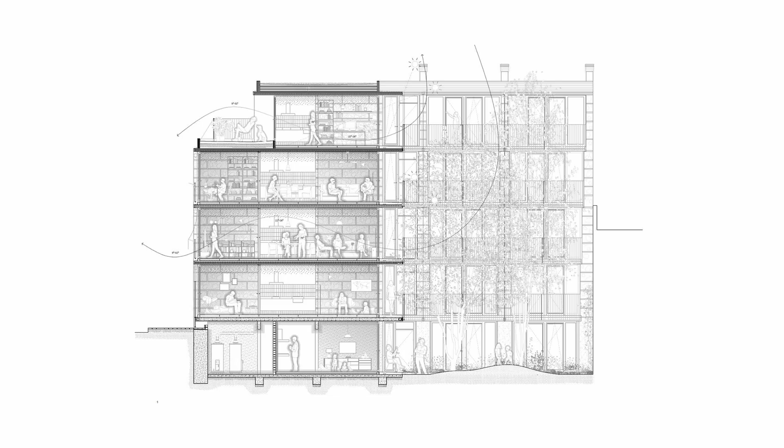And again, how does it work in terms of how to perform the comfort using the thermal mass of the blocks, cross ventilation for all the apartments, etc. And this is after the completion of the work using these traditional roller blinds.

And in this facade, which is a party wall that will never be covered, you can see, well, it's not easy, but you can see a bit the difference between the lime concrete bricks on top and the others that are made of cement, that are a bit grayer than the ones on top.

All the apartments are almost all of them similar. We have 3 typologies, but we have the main one, which is this one. And they are very basic.

And then at a certain moment, a very good architect from London, 6A, came to visit the building, and we explained that, yeah, it's a repetition of the same apartment, the same typology several times, so every apartment is the same. And he said, you are wrong - each apartment is different because every brick is different. So using this system, you are creating a way to make differences doing the same distribution, and it's true. So there is no stone, no brick similar to the other.

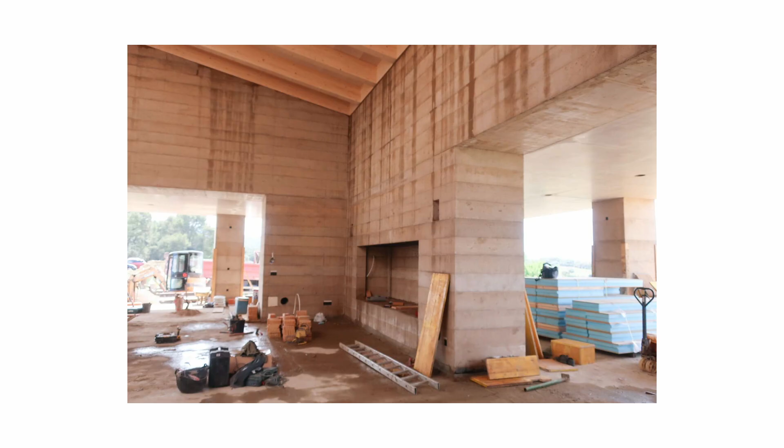And of course, not only in the office, also during the construction. Our design process includes the construction for sure, so again, we are always ready to find the best solution. And if the best solution appears during construction, we are ready—not David, because he's always having the numbers—but the rest are ready to change the project and transform one solution into another.

That means probably less money for us, but more time, some tricky situations. But architecture is first in our office, so all the effort goes in this direction.

So we work hard. La bona vida in Catalan means good life. We like good life. We like to work—to work is a good life for us. But what we do twice per year, at Christmas and summer holiday, is all the office, everybody, goes to visit the different buildings we have under construction.

Or we have completed, and we try to enjoy and share what the office is producing, and it's a very special day. We spend the whole day. On Christmas it's shorter but with more evening, more night—not a problem. And in summer, yeah, the day is so long. So in this case, we went to Llastret to visit the house, and the owners invited us to have lunch. It was amazing, and finally we went to the pool.